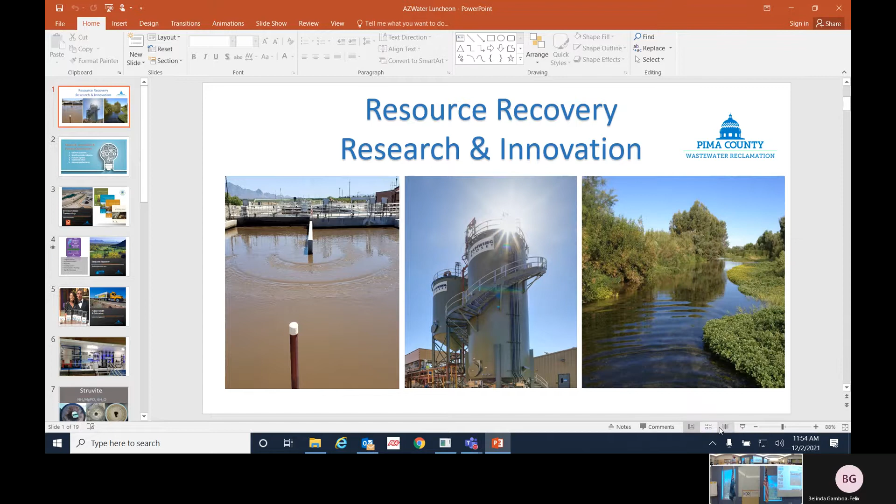I only picked projects that I've been working on for like the last 5 years, right, I didn't go back too far. We've done a lot of stuff in our research and innovation work. When we developed this water campus in the West Center, our goal was to really train the next generation of environmental scientists. I always use the analogy: when NASA's looking for rocket scientists, they call MIT and Cal Poly, those are probably the first they call. We wanted engineering firms and consultants, when they're looking for process control engineers and environmental engineers, to come to Southern Arizona. So that was our goal.

We do a lot of stuff conceptually, but we don't have the opportunity to take it to full scale. That's what the West Center is about. If you're an engineering student on campus doing our type of work, wastewater analysis, you've got to leave campus with a truck, a trailer, some kind of vessel to fetch water. You're probably limited to about 50 gallons because of the weight, and you've got to get that back to campus and somehow from the parking lot up into your lab.

So it really limits you to bench scale type projects. At the West Center, we can take stuff all the way up to full scale, piloting 500,000 gallons a day in that facility. So some of our projects, like we had a TTHM project, we did that work right here at our lab, right across from the lobby, as proof of concept. We built a full scale pilot at Tres Rios.

Now it's in full scale implementation at both East and West plants. The struvite work, we did a lot of that with the university about 4 years ago. We have a full scale version there. Alejandra was our intern when we first started doing Anammox research, we had a 3-year grant. We're now constructing an $8 million full-scale Anammox project at Tres Rios to knock down ammonia levels from our centrate recycling. We take stuff from bench scale all the way up to full scale because of the resources we have. It's quite nice.

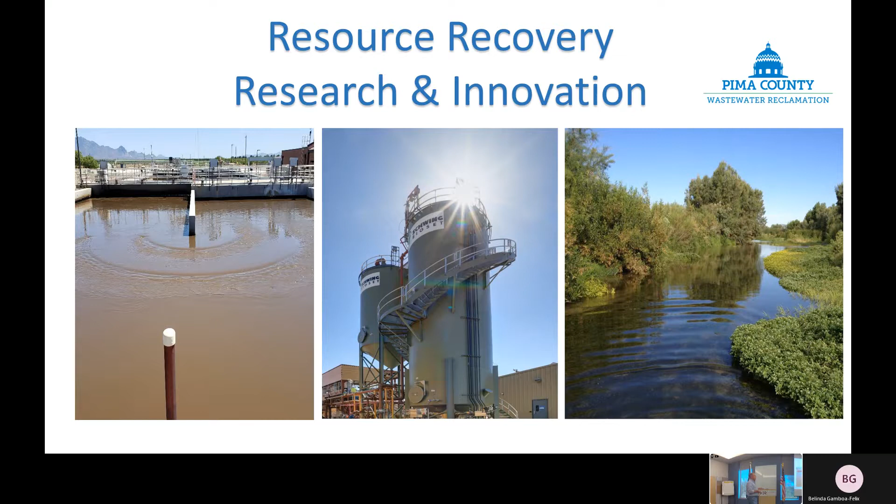Can you get the next slide there? Yeah, this thing isn't working. Broken.

All right, so here's our group. We started a group at Tres Rios, we call it, in treatment division, it's called Research and Innovation. Alan Anton leads that group. What we try to do is talk to our operators, talk to our maintenance folks, and evaluate processes. We look for things that aren't quite working well, hear feedback from our staff. We observe the problems, we try to identify solutions. We look at what others have done nationwide or worldwide. We evaluate which of those options is suitable for retrofitting our facility. Then we'll implement them and measure that performance. And we do this every day.

Lisa was with us yesterday with HDR, we toured some sites in California. I have a slide here in a bit. We're thinking about building a biosolids drying facility, and so far we've looked at about 5 different versions. And every site you go to, you say, boy, I really like that feature, I like that, that's horrible, I would never do that. And so all those things you see will get drawn into our final version that we construct here.

Next slide. So wastewater treatment, we make 3 products, right? Wastewater comes in, we treat it, and we make high quality effluent, we make a high quality biosolids, and we have a biogas product. So those are all the processes. And so it's really become less about wastewater treatment and disposal, it's more about resource recovery and how to do that efficiently. I think you'll see over the next decade it's going to be all about energy efficiency and energy optimization, because energy is going to skyrocket for us here in the U.S.

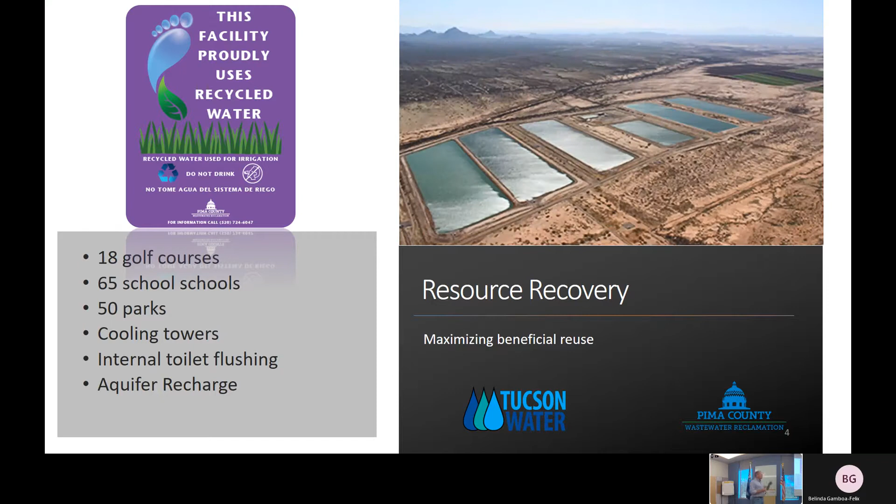Next slide. Our biggest partner is Tucson Water, and so we manufacture about 65 million gallons of high quality reclaimed water every day. Every one of our facilities puts that water to beneficial use. We recharge that water to augment our aquifer and reduce the amount of groundwater we're pumping. And here next door, Agua Nueva, we call this a scalping plant. All the water we produce goes right back into the city of Tucson's reclaim system for distribution at 18 golf courses, 65 schools, parks, all these features right here. Plus we put about 4 million gallons back into the river for riparian habitat restoration. Next slide.

All this equipment is going to be put back into use. We've mounted each of those process units on individual skids at the West Center. We just got a $2 million grant from EPA to do DPR analysis on log removal efficiencies for all these different processes. So all that equipment that was donated by manufacturers is going to be put back to use, and we'll have continuous operation making high quality water next door. We're looking to resurrect that activity, bottle some more water, and possibly give it to brewers to keep that conversation going.

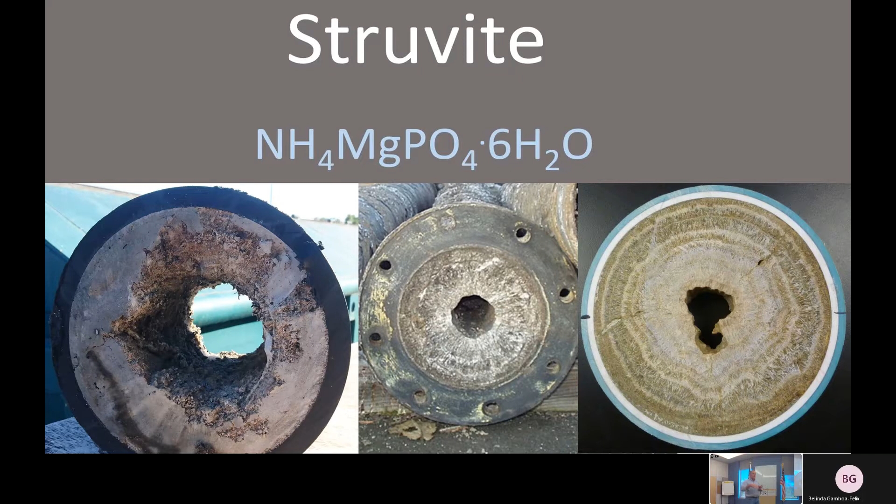So we started searching for ways to eradicate the struvite. We were adding ferric chloride - very expensive - and ferric chloride is corrosive, it destroys all your infrastructure, just rusts stuff away. In 2017 we invited a firm out, Airprex, and we did a 5-week pilot demonstrating this technology. It's called selective precipitation. We add the magnesium, the limiting reagent, and force this precipitation and reaction to occur where we want it to, instead of in our tanks and pipes.

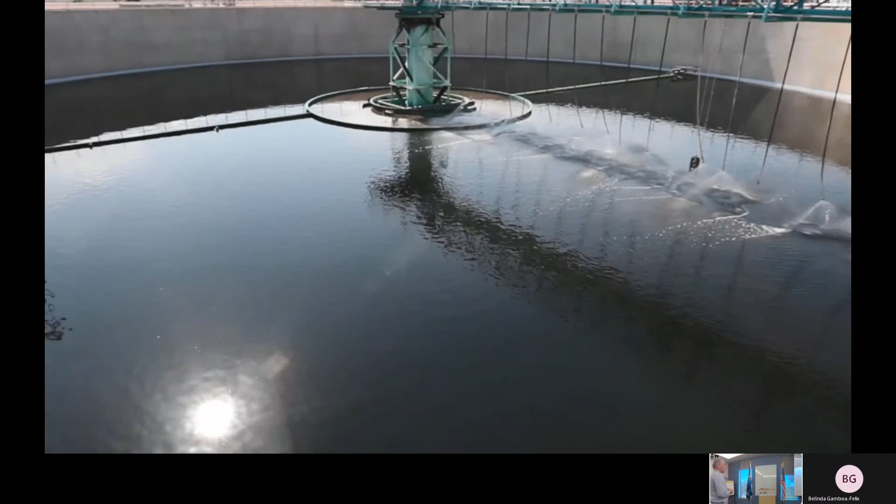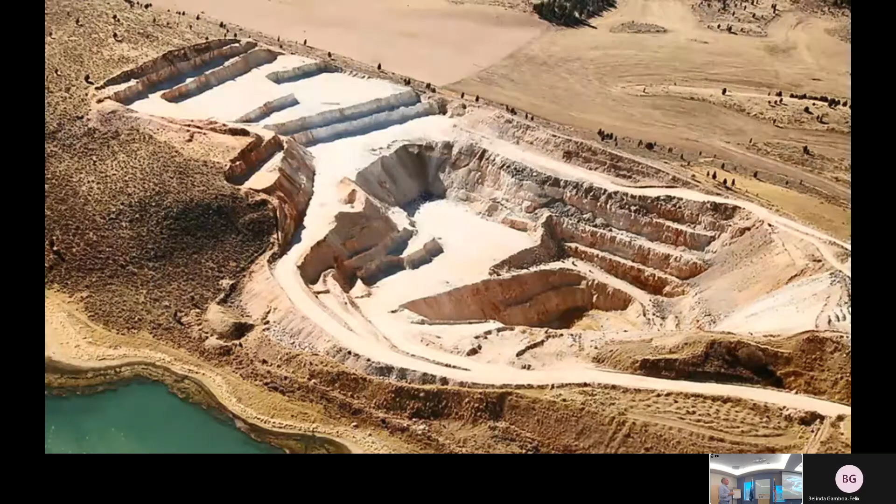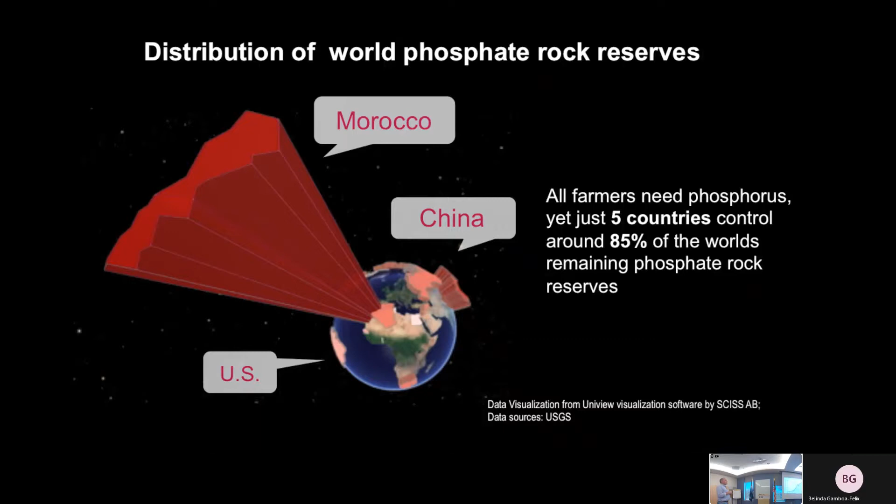Pima County Wastewater Reclamation strives to be an industry leader in the sustainable management of resources, public health and safety through excellence. Our nutrient recovery project exemplifies this commitment, creating a renewable resource from an otherwise debilitating byproduct. It all starts with the well-known element phosphorus. It is the backbone for both DNA and ATP, key components every living organism needs for growth. Unfortunately, nearly all phosphorus needed to produce crops and the foods we eat is mined from phosphate rock. Over 70% of phosphate originates in Morocco and is exported worldwide, with China a far distant second. The United States accounts for less than 2% of the world's phosphate demand, with mines located in Florida, Idaho, North Carolina, and Utah. Without active management of phosphorus resources, these supplies are estimated to run out in as little as 50 to 100 years, making phosphorus potentially more important than oil.

While all plants thrive in the presence of phosphorus, overuse can contribute to farm runoff, resulting in pollution of our rivers and lakes, and potentially leading to harmful algal blooms. Phosphorus in the foods we eat is also excreted in sewage, where it can potentially pollute our waterways.

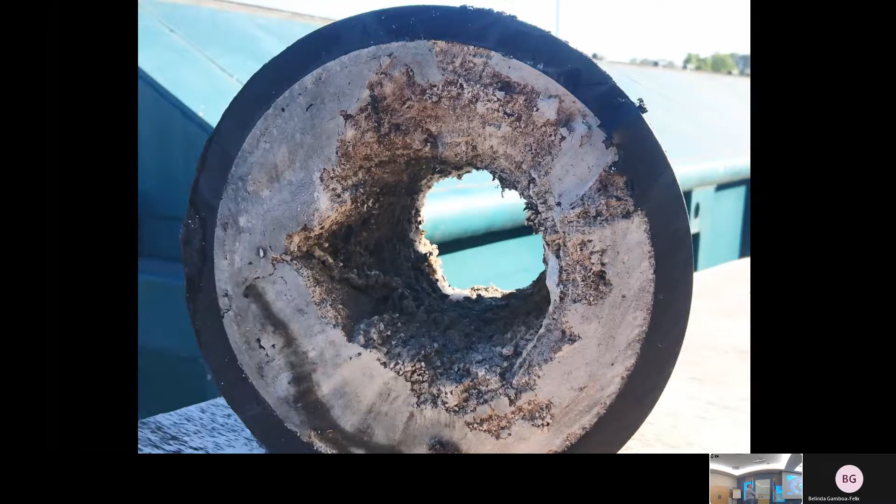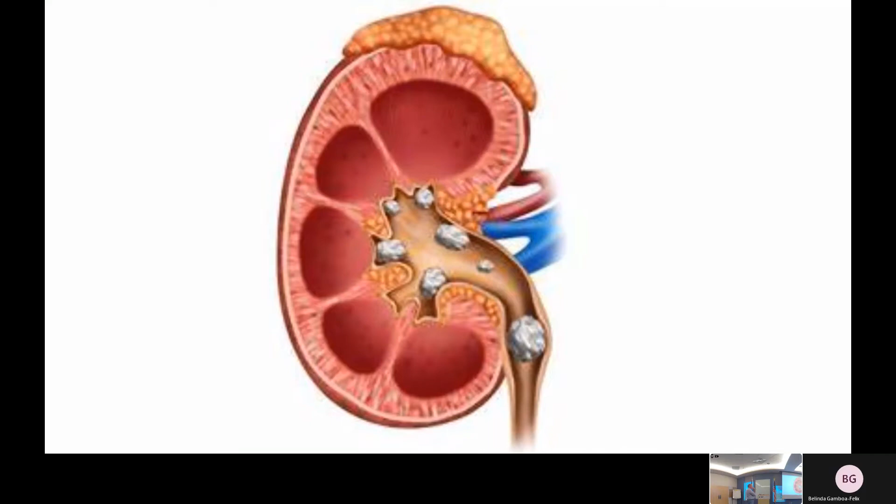During wastewater treatment, phosphorus can often create a concrete-like substance called struvite, creating catastrophic problems if not managed. Struvite is comprised of ammonia, magnesium, and phosphate. If you have ever experienced kidney stones, you too have encountered struvite. Treatment plant operators use corrosive chemicals and mechanical processes to combat struvite, which increases the cost of treatment.

To solve this problem, Pima County embarked on a comprehensive phosphorus management strategy, utilizing both biological phosphorus removal, followed by a selective precipitation of struvite in a controlled reaction. The nutrient removal system, called NuReSys, is not only a first for Arizona, it's the first installation in all of North America. Captured struvite can be beneficially used as a slow-release fertilizer, minimizing traditional fertilizer usage. This is a significant advantage in keeping phosphorus out of our waterways.

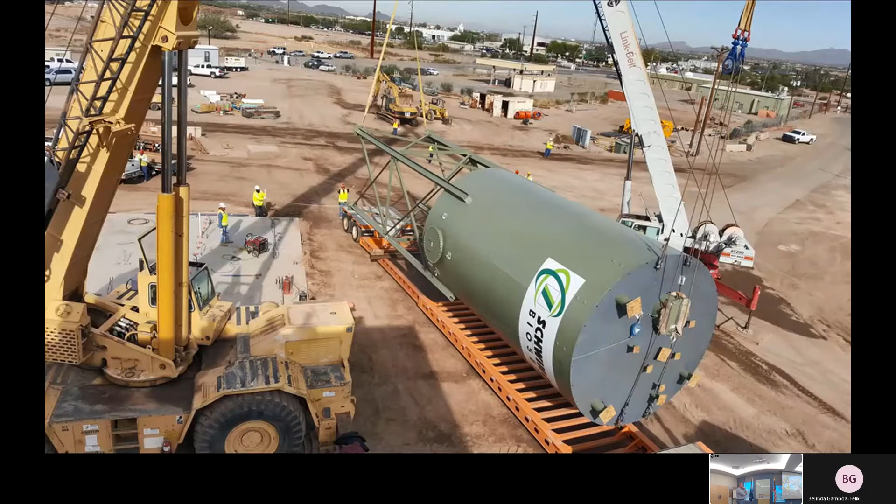Pima County's innovative technology will not only benefit Arizonans, but it will also serve as a model for utilities nationwide, improving our waterways and reducing the worldwide phosphorus demand.

And so that's the finished product there. It's been in operation since about March this year, but 750 fewer haul trucks on the highway a year. We were able to increase our percent solids from about 15, 16% to 20% solids. That's a tremendous amount of savings for us in trucks and possibly accidents. We had one rollover in July of this year.

But all that phosphorus, 85% of the world's phosphorus, all comes from Morocco. So it's being mined in one place, shipped across the entire planet on tankers. And so I think it's great, we capture that phosphorus, it goes right back into biosolids. So all of our local farmers, that reduces their phosphorus load. And they're not using an inorganic type phosphorus that will then lead to farm runoff. This is a slow release, organic type for everyone else outside.

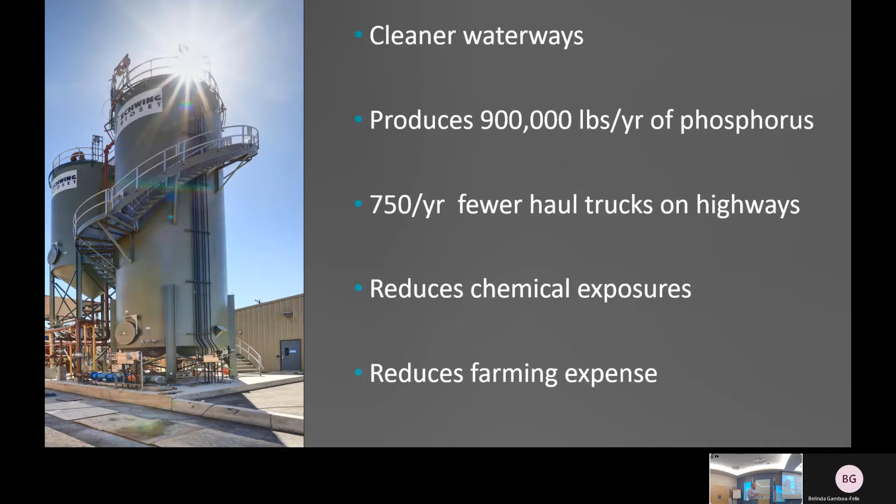Our biogas, methane that comes out of the digesters, is 60% methane, 40% CO2. Typically a lot of facilities will burn it in their own engines, cogeneration. We did that at Tres Rios for about 25 years. When we built these new facilities, the air quality permitting was so onerous that it didn't make it feasible. So we've been flaring that gas, just wasting it, sending it to the atmosphere since 2014. One of the treatment plants we were at yesterday in California, they did cogen as well until EPA changed their regulations. They can no longer use it for cogen, so they're burning it in boilers and stuff like that.

And so this is a 3-stage membrane process. You really have your pressure swing adsorption, vacuum swing adsorption, single stage, second stage, and third stage. We went with the third stage. First stage will get you about 85, 89% pure methane. Second stage will get you around 95% pure methane. We went to the third stage to get us 99% methane. So we're putting real high quality gas in the Southwest Gas pipeline.

Then we sell that gas for the RIN credits. You get D3 or LCFS credit, that's low carbon fuel standard in California. So we make money on this. This process is probably going to generate around $3 million a year in revenue. That's revenue that reduces our need to raise our rates and our rate structure to help maintain our utility.

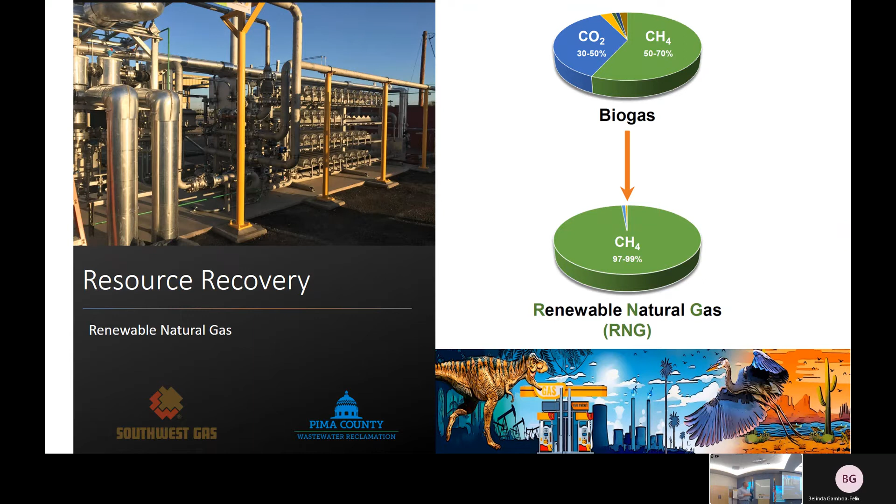So this is the NuReSys process. First step, the gas is typically 60% methane, 40% CO2, but it also has hydrogen sulfide and some impurities in there, like siloxane and stuff.

So this is the treatment process. Ferrosorb, it's an iron oxide. The gas goes through it and creates ferric sulfide with the hydrogen sulfide that's in the tanks. Then we supplement with a little bit of oxygen to keep the rust process continuously going, so it's always creating fresh ferric oxide that will react with the hydrogen sulfide. So we're precipitating out ferric sulfide and sulfate, right?

Next slide. Come on, Mary. Just a minute. Just a minute.

So then this is the actual skid of the treatment process. These are carbon vessels, GAC carbon, just like we'd use in water treatment, when we're pushing air to it. These are going to remove volatile organic compounds and those siloxanes. Then we have a feed gas compressor right here.

We pressurize this up to about 250 psi, squeeze it through these membranes. These are Evonik gas membranes. When it goes through them, it extracts out the CO2 that gets fed into the atmosphere. The methane then gets compressed again to about 400 psi and injected into the Southwest Gas pipeline.

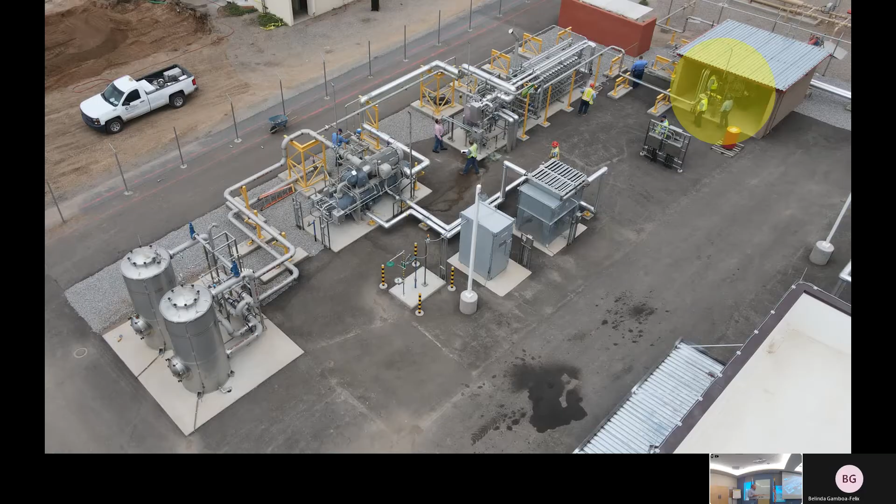Everybody talking about that. Our last product, biosolids. So all the biosolids we generate get put to beneficial use on the farmlands out in Marana and in Casa Grande. But we're seeing a real problem in Arizona: we can only apply our biosolids to privately owned land because we make a Class B product.

In order to apply to state land that's farmed, you have to have a Class A biosolids product. And when a new highway like Interstate 11 is slated to go right through Avra Valley, where all of our farmlands are, it's going to be the private lands that are sold off first. So I've got a need to move to a Class A product.

And everybody's heard about PFAS in groundwater, right? Tucson Water struggling with it, Marana too, very expensive, nationwide, everybody's dealing with PFAS in groundwater. So one of the concerns from our Board of Supervisors was, our biosolids application, which we've been doing for 25, almost 30 years, is it having any impact? Are we concentrating PFAS in our biosolids? Is it going to leach into the groundwater in the farmland?

So we did a one-year study last year in conjunction with the university and Jacobs Engineering to evaluate it. We went out and looked at crops that have received biosolids for 20 years, 10 years, at different loading rates, and sampled the soil at 1 foot, 3 foot, and 6 foot intervals. Overwhelmingly, you get 97% attenuation within the first 6 feet.

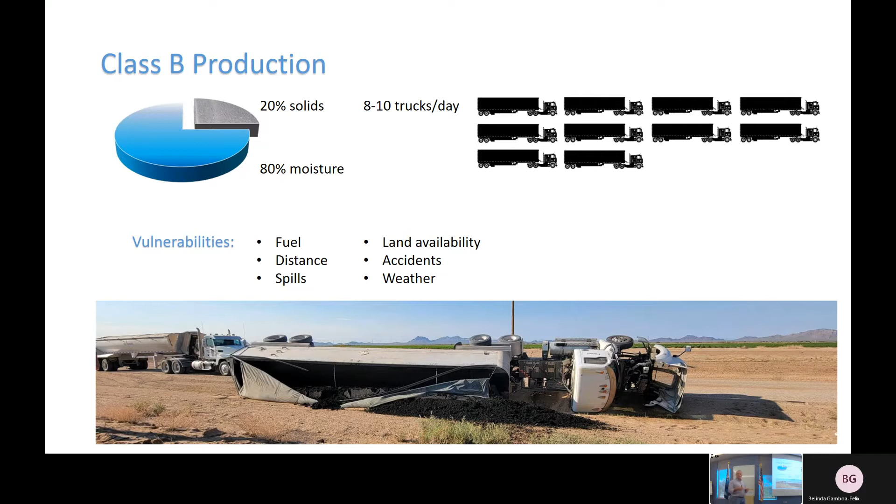This was in July. Luckily, he rolled on a farm field, not on a highway. But all this can happen. And so with this scenario, knowing that my farmland is slowly being urbanized and sold off for development, I need to make less biosolids, and I need more outlets to distribute it.

And so going to a Class A, I've taken this 20% figure to an 80% figure, and I've reduced my moisture from 80% to 20%. That would require me to only have 2 trucks out on the highway any given day. So this is my goal.

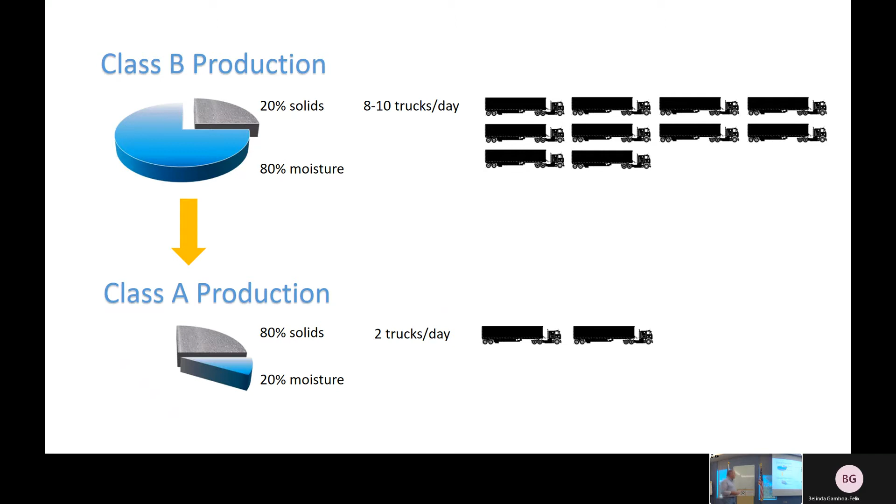And by making Class A product, all that statewide land that's leased to farmers right now becomes an available avenue for me to dispose of biosolids. And then farmers get the benefit of this soil amendment for fertilizer. And so that's what we're trying to do right now.

And our idea is to build a greenhouse. This is a cartoon of some legitimate ones. We just saw 2 in the last 2 days in California. Surprise, Arizona's got a really unique one that they did as well. But essentially, the biosolids come into the greenhouse.

You let sunlight in, or you can also have a heated floor. You're driving this moisture out of the biosolids into the air. Then the air gets scrubbed through air scrubbers and evacuated.

So our goal is to take that 80% moisture and reduce it down to 20%, so that I can haul fewer trucks out there. By making it a Class A product, one thing that we've also seen is people have pelletized it, making these real small pellets that can then go on golf courses, or people can get it at nurseries and stuff like that.

It's recovering natural resources. And so this is where we're focused right now. We'll probably go out to bid with some designs on this in July.

We're trying to partner with Surprise right now to send some of our biosolids material. I'd like to send a truck over there a month for the next few months, have them dry it, take that material, send it out to a contract lab, and have them demonstrate, yes, this will make a Class A product. And if it's close but not quite, we'll look to put a dryer on the back end, or maybe a pelletizer. But those are the processes we're looking at right now.

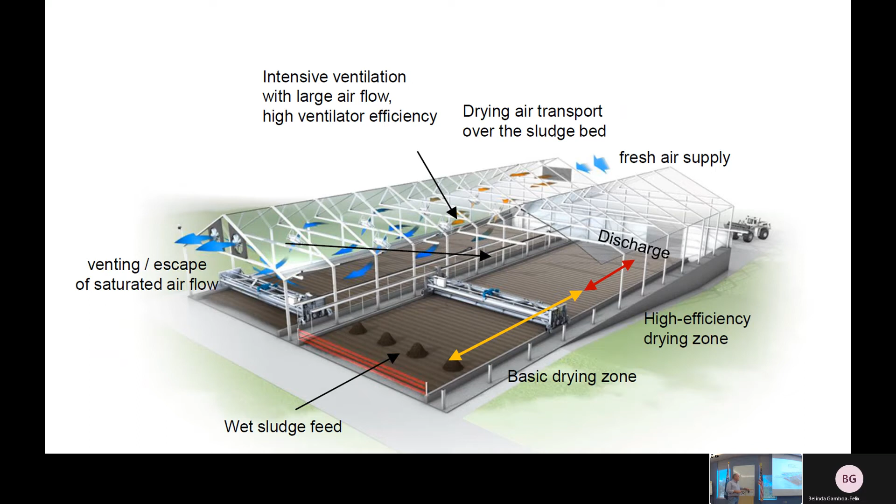The struvite, just a funny note, those cross sections, I've seen them for sale at the gem show. They take these pipes, the crystal cross sections are beautiful, and they sell them and people hang them on their walls. We have one in our office. I'll give you all you want. I'm saying, in terms of revenue streams, here's your future revenue streams.

But what about the haul trucks for the struvite process? What are those haul trucks doing, what are they hauling? They're hauling biosolids. But because of that NuReSys process, you have monovalent and polyvalent cations. Because we're precipitating out the magnesium, it allows us to get up to higher percent solids, so we gain about 4% extra solids. That's more solid, less water, and fewer trucks on the road.

I'm a chemistry major, so I kind of get stuck in the details here and bore people, but that's what I do.

Well, since you're going to produce Class A, are you going to sell that then? That allows you to put it anywhere you want. Yeah, some places sell it. They sell it more as a marketing campaign, just to show how good the utilities are. I don't think it ever makes revenue, but a lot of utilities sell it. You can go to Home Depot and get it, they always call it some kind of grow name, you know what I mean? They do it just as marketing for their utility.